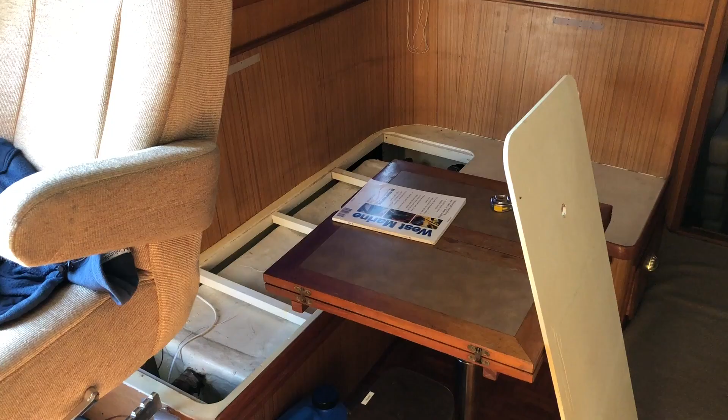This is my holding tank. It's a steel tank encased in fiberglass. The tank itself appears sound, but all of the hoses are old, cracked, permeated with stinkiness. My primary issue with replacing hoses is the pump out hose.

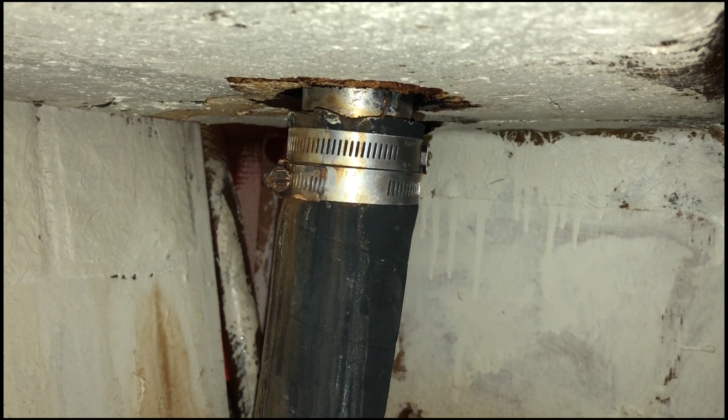I can't actually get my hands in here to release these hose clamps and fit a new hose, and as you can see here, the present one is leaking, and I can't figure out if it's bubbling up between the rubber hose deck fitting or if the leak is higher up at the deck level. But you can see all this nastiness that has dripped down, and it's all pretty stinky.

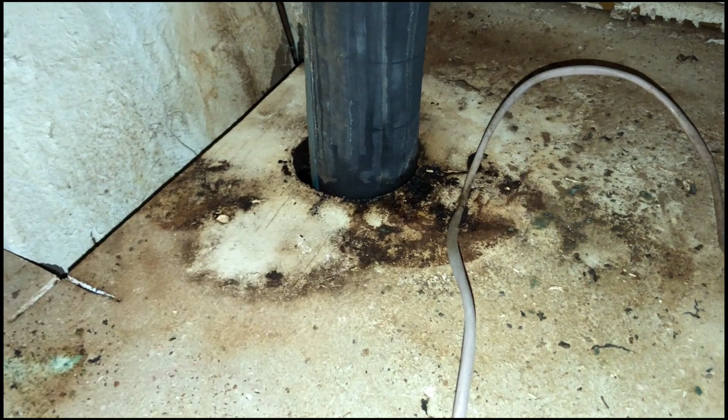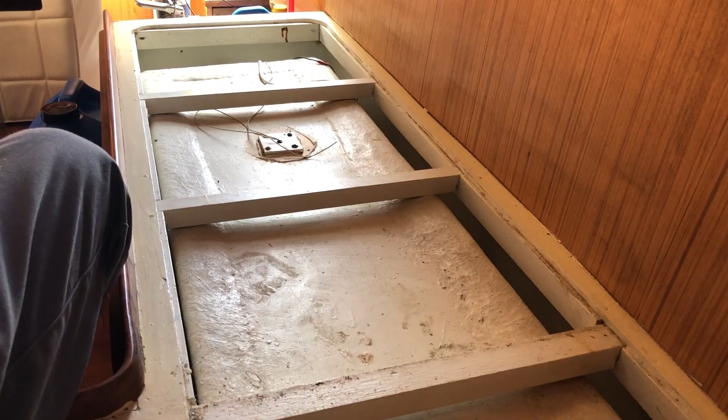Here's my holding tank air vent to the right. It's undersized according to Peggy. I need to have a larger vent. I believe it's 1.25 inches. The pump out hose is the lowest hose at the bottom of the tank.

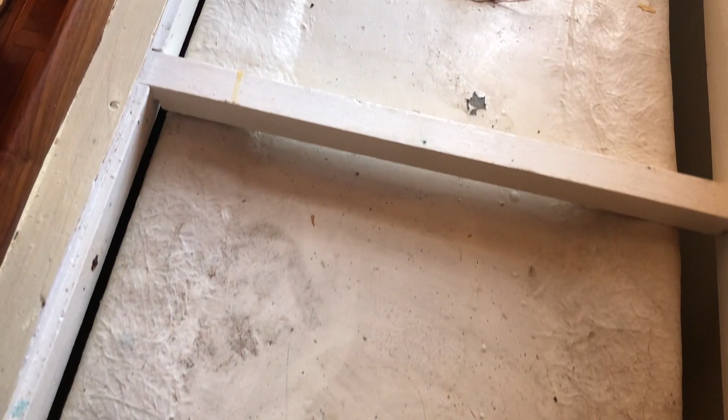This right here is an issue because that means there is always standing liquid in the lower hose, and the principle behind rubber hoses, what I've learned from the book, is that they should be empty or have clean water in them. If you have dirty standing water in a rubber hose, even a marine sanitary hose, it will eventually permeate and get stinky. That is the forward head hose, 2-inch.

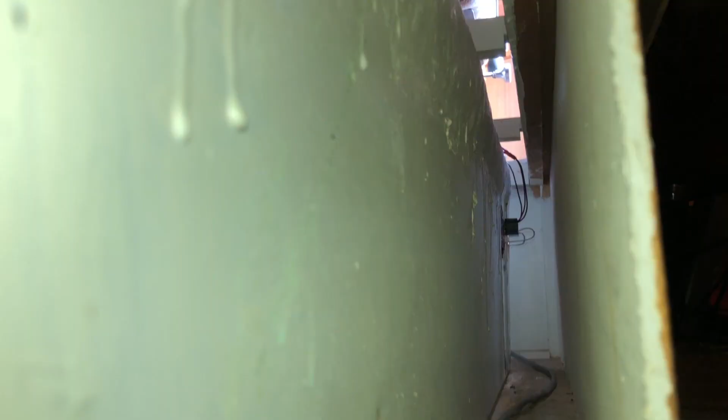I should replace this tank with a new tank that has all of its fittings on the top side. Unfortunately, there are no stock tanks from a local supplier, Ronco Plastics, that match the dimensions of the cabinet. So I could cut this piece of plywood away and fit a larger tank. I would just have to reinforce the settee seating with some additional framing. I'm not afraid of that.

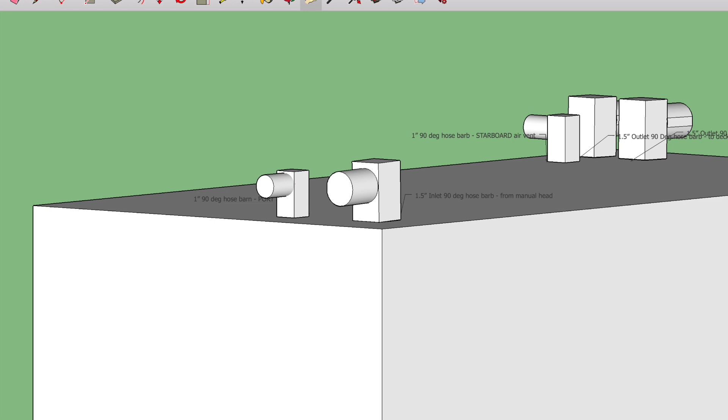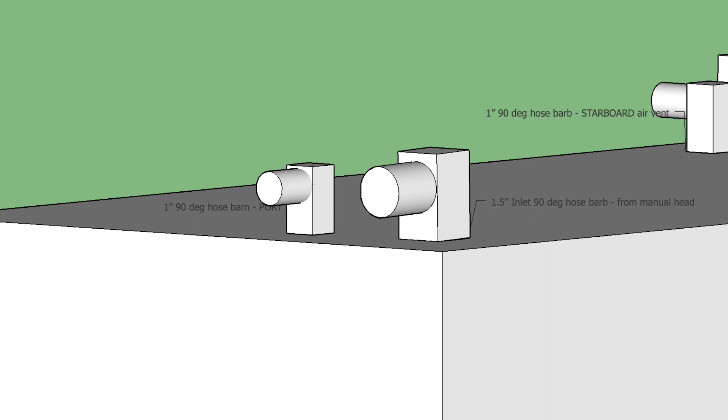I would have to upgrade my forward head from the manual pump to electric, or I could keep the forward manual and simply install an inlet that's 1.5-inch versus 1 inch. My takeaway from the book was that if you can have fresh air circulating in the tank, that minimizes the anaerobic bacteria. So I designed this with 2 vents, thinking I could repurpose an existing through hull on the port side and have some cross ventilation.

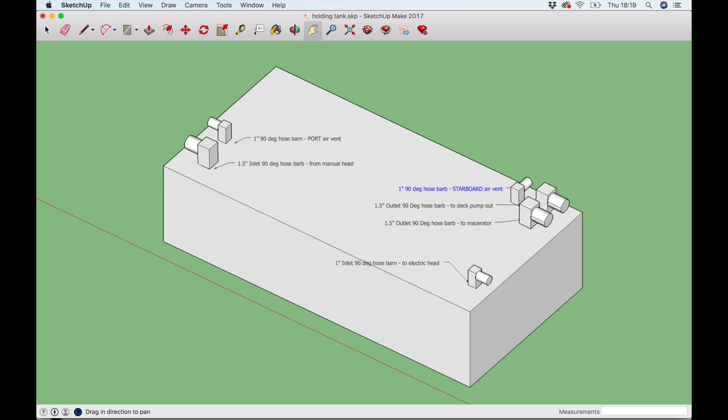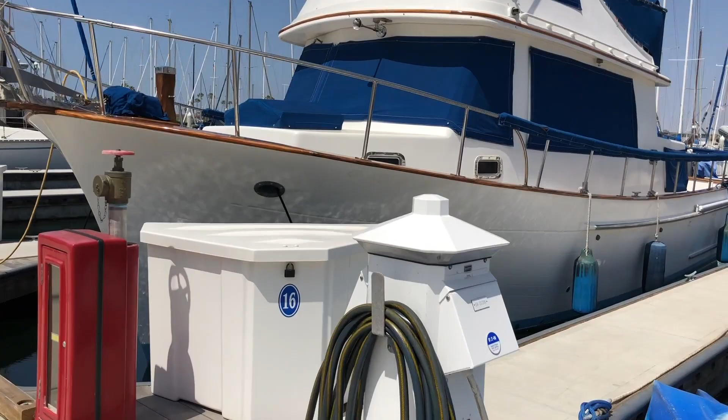In my current slip in the afternoons, the wind's on my starboard side, so I could have it blowing into the starboard vent and exiting the port side naturally. And this would be using 1-inch vents, two 1.5-inch outlet connections, one for a macerator pump to go over the side when offshore, and the second would be for the deck through hull fitting.

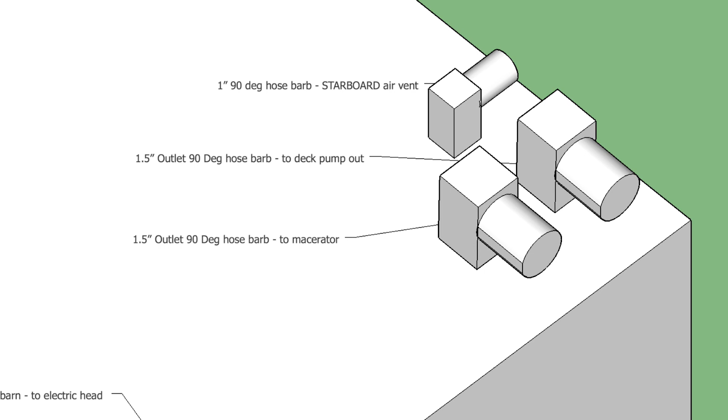Thinking it's cleaner to just have 2 separate outlets, and I can put a valve right on the top of the tank for the overboard pump, so I don't have to go down into the engine room to open and close that valve. It'll be as simple as lifting the seat cushion. I've been holding off on committing on any of these upgrades because the location of this tank is bizarre. It's under the galley table, which is an uphill pump from both heads by several feet.

I've been aboard another CHB, same model, that has 2 holding tanks, one for each head. The forward tank is under the V-berth, aft of the anchor locker, and then the aft head has a tank underneath the aft bed. We've discussed deleting the forward head and making that space a dedicated shower. However, we have guests on board several times per year, and it is nice having that second head.

The current space could be better utilized for a number of different applications. I've thought about making that a cold plate, built-in freezer. It'd also be a great place to install 1 or 2 air conditioning compressors. So I don't know. I've been going in circles on this for a number of months, and in the end, I think the easiest path is to just install a new tank in the present location.